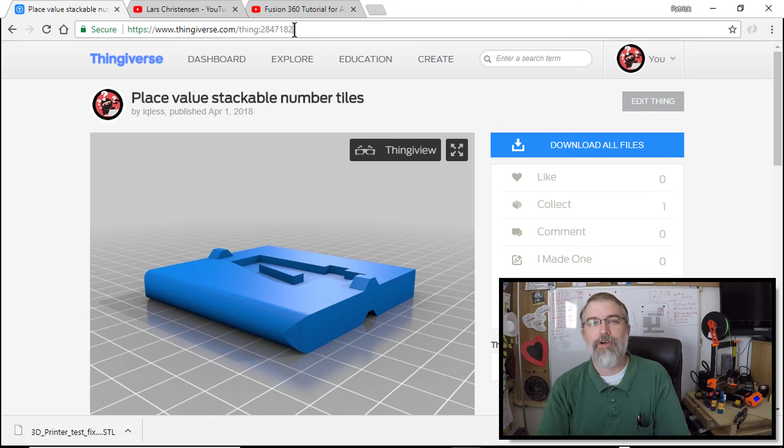I think 3D printing is huge, and it will be huge for homeschooling and for schooling in general. So we have some needs to 3D print some stuff out for our homeschool kids to help them understand concepts. And I was hoping to put a challenge out to other people to do the same. So it's the start of it, and I hope it gets bigger, that my wife can challenge me and say, hey, I need something that does this.

Can you make it? And I want to challenge other people to try to make the same thing, or not the same thing, but something that would solve that problem. And then highlight it and show everyone so that a bunch of kids out there can have access to some really cool manipulatives that can really help enhance their education.

So with that, this is the first thing that we put a challenge out for. My wife put a challenge out to me to make something to learn and figure out your places, your ones places, your tens places, and your hundreds places. And so this is what we came up with, and I put it out on Thingiverse.

And so I just want to walk through showing people how I made it in Fusion 360 to maybe give some idea how you can design stuff in 360, even at a beginner level, because I'm at a beginner level. I've only done a few things, and I want to show you how I made it, and maybe you can get some ideas. I just want to share. Okay, with that, let's get going.

Okay, let me try to recreate what I created before here in Fusion 360. So let me get started here. So here's my model from before. I will try to show you how I made it. So let me start new. Don't save. Let me go up here and say new design. And then from here I will click right here and say new component.

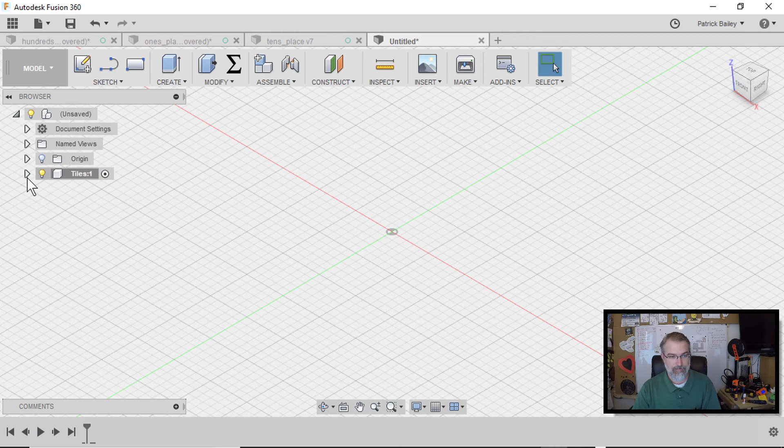And I will call this single tile, or just tiles, because it could be multiple tiles the way I'm doing it. So tile. Okay, so from there, I can open that up and click on that little light bulb so I can see these origin planes that I'm going to use here in a minute. And now before I get started too far, if you look over here on the upper right hand side, you'll see that my z-axis is up, which is not the default setting.

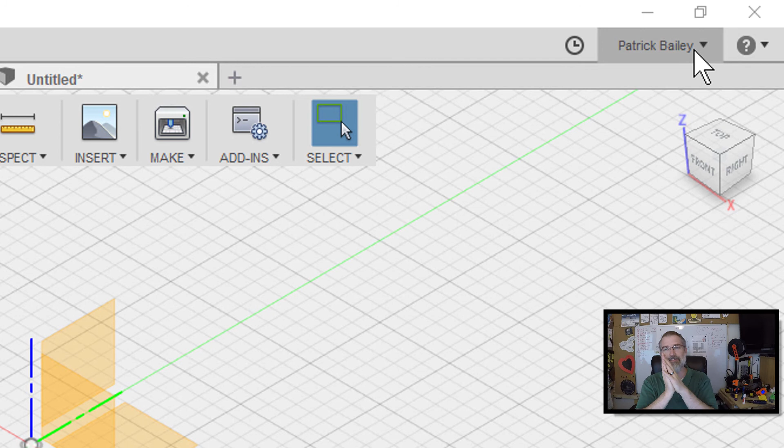But it's very useful if you're printing, because on 3D printing, the z-axis is up. Otherwise, if you try to create the 3D print from here, the STL file will be 90 degrees wrong, and you probably don't want that. So if you want to change it, you can go up here, go to your name, go to Preferences, and you'll see this default modeling orientation. And you want to set it to Z up. And then after you do that, you'd hit Apply and OK.

Now the last time I did it, even though it made the change, it didn't apply it to exactly what I was working on at that moment. So I actually had to go restart Fusion 360. So you may need to restart Fusion 360. Or if someone knows a button you can just push to refresh, that'd be nice to know too.

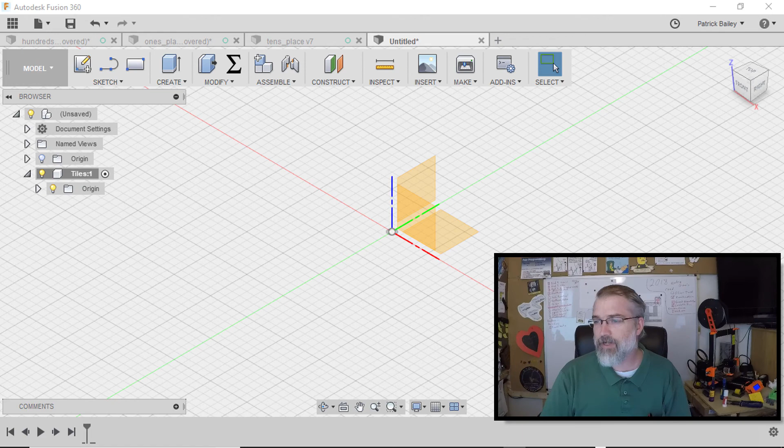Okay, so let's get started. This little tile is 10 millimeters tall, and it's 70 by 70. So what I want to do is create a rectangle that's 10 millimeters high by 70, and then extrude it 70 millimeters. In fact, I actually want to extrude it 35 millimeters, halfway, because then I'm going to mirror that object.

And there's some reasons I'm doing that, because I'm trying to follow good parametric programming at the level I know. Someone like Lars Christensen definitely knows what he's doing. I'm following him, trying to figure out how to do good parametric design. And so that is part of it.

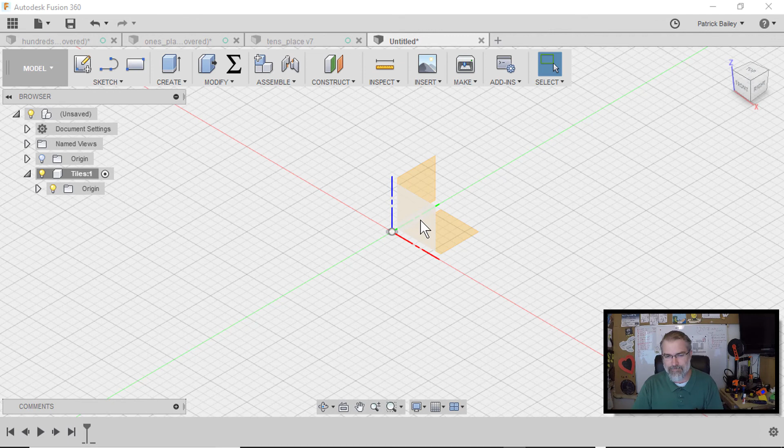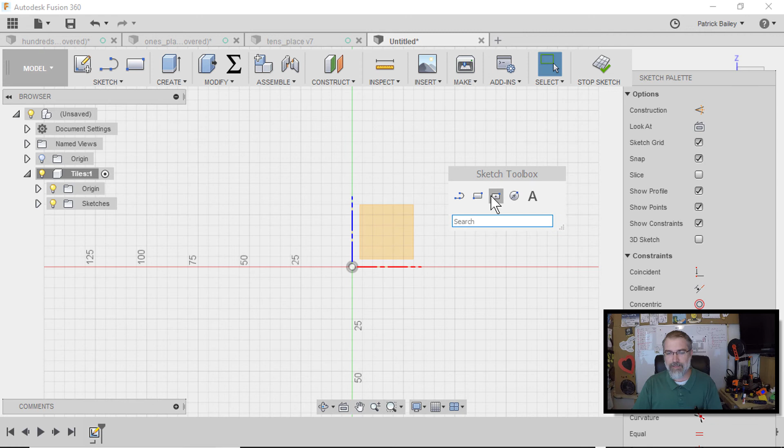So let me right click on this face, this plane, and hit create sketch. I want to create a rectangle here. I can come up here and find the rectangle tool. But an easier, better way to do it is I can press S, and this little sketch toolbox pops up. In this little area, I can put the common tools I want to use, or down here I can just search for it. So if I search for rectangle, I'll see there's 3 tools.

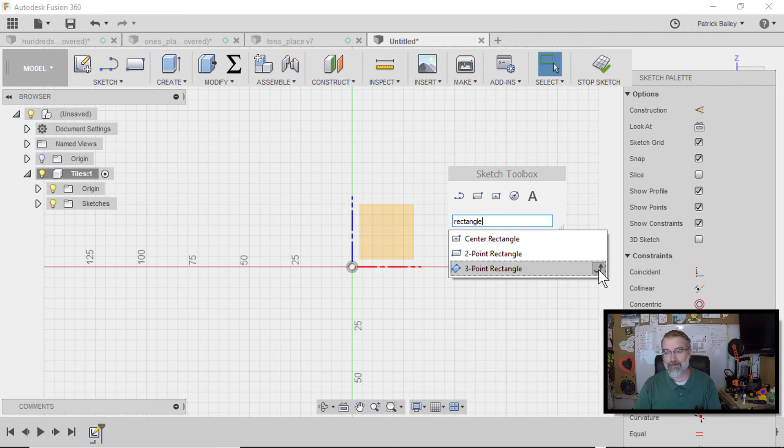Now 2 of those tools I already have in my sketch toolbox. This third one I don't really need either. But if I wanted to use it, I could just click on it. If I wanted to add it to my sketch toolbox, I could click on this little curly arrow and it would get added, like it just did right there. But I don't want it added, so I can click on that, drag it off, you see the little trash can, and let go. Now it's gone. I actually want to use this 2-point rectangle tool.

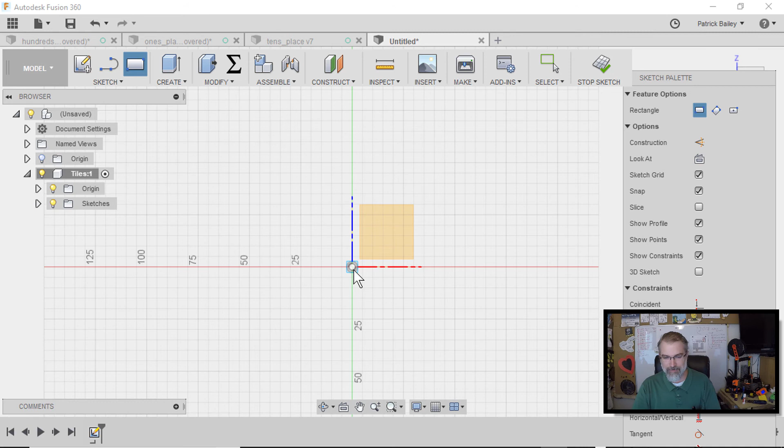So I'll click on there, and then I want to tie this down to the origin. You see this little dot down here is the origin. So I'm going to tie it down there. I'll click there and go out. And you can see I kind of snap to grid here. So I can actually go down to 70 and down to 10 and call it good. But a quicker, more precise way to do it is just be arbitrary like this.

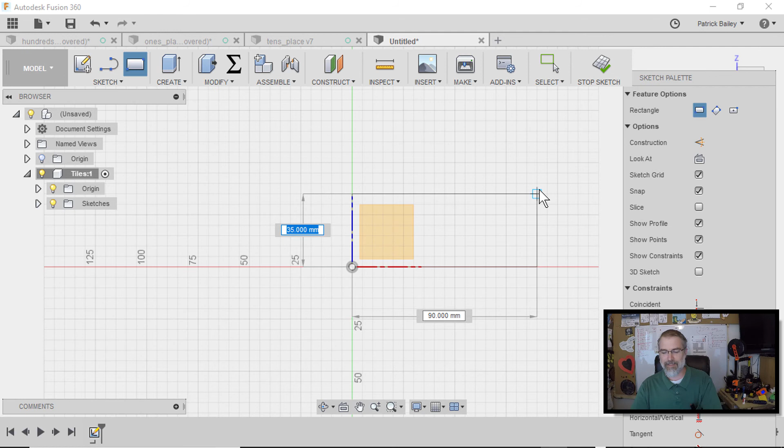And then, in the box that's highlighted, I can start typing. So I can type 10 for 10 millimeters, hit tab, which goes to the other one, then type in 70 and hit enter, and now I get the exact rectangle with the exact dimensions I want. You can also see that all the lines on it are black, which means it's tied down, it's constrained. I think constrained is the correct word to use.

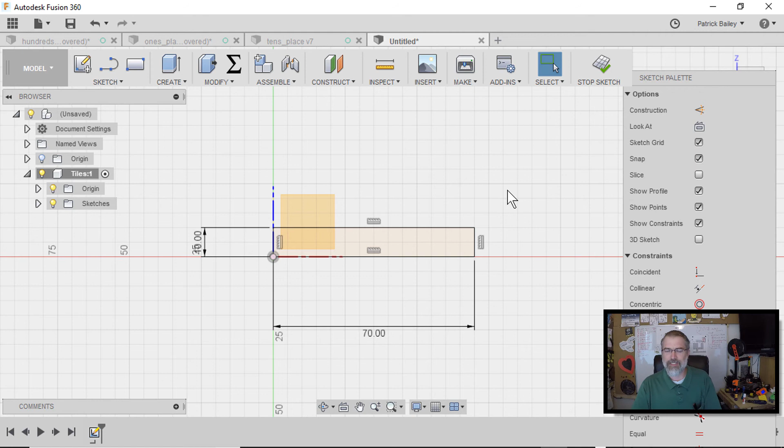But let me show you the difference between something that's constrained and something that's not. If I draw another one where I don't start at the origin, but just do it right here and hit enter, you'll see all the lines are blue. And if they're blue, they're not tied down. Now you can draw something blue and tie it down later, which is what I'm going to do in a few minutes. But if you see blue, you want to tie it down for good parametric design. Okay, so let me undo that, Control Z.

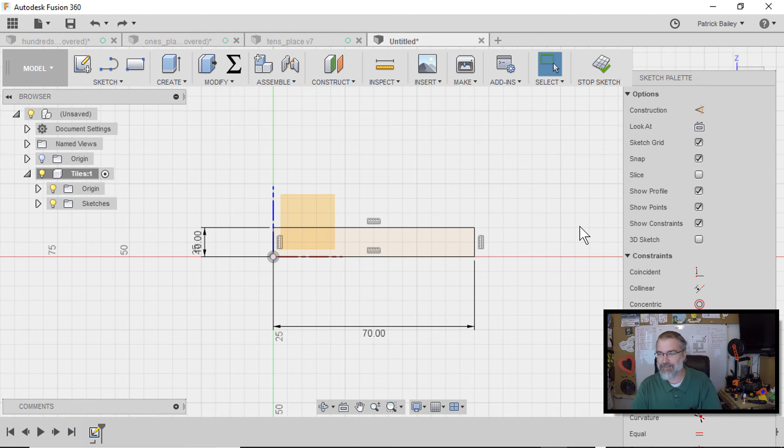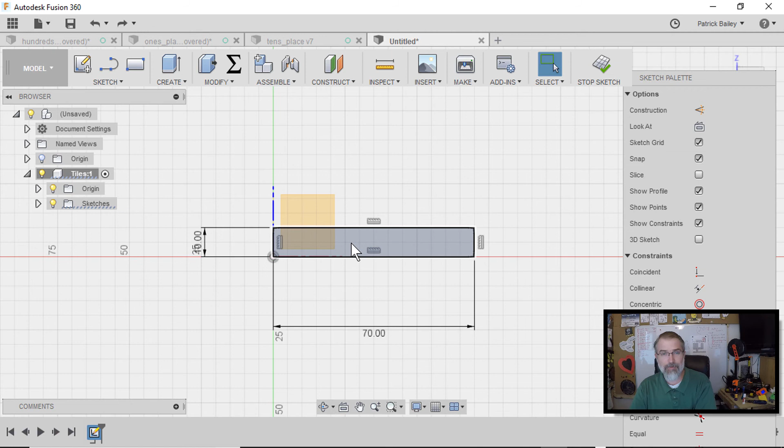Okay, so now I want to do my first extrude, where I want to extrude this out 35 millimeters, which is halfway. So I can come down here and click on this little plane, I guess you'd call it. What's the right word? I'll learn the right word here. And I'll press Q, and Q will bring up my press pull tool.

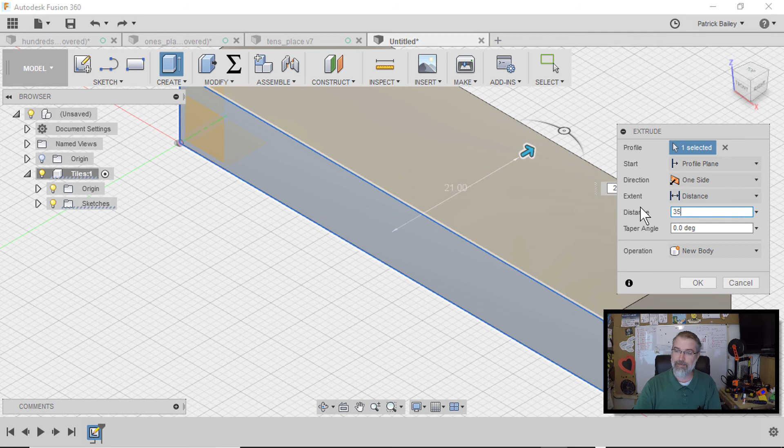And I guess maybe profile is the right word. And so I've selected that profile, and I'll go up here and click my home button so I get a more interesting orientation here. And now I can drag it. And so I could drag it to 35, or I could type in 35. Boop. And it's going to be a new body, and so I hit OK. And that is exactly what I want.

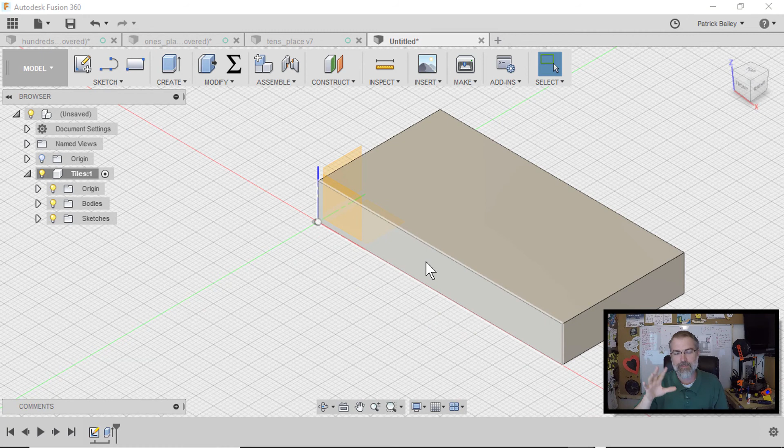So there is my first extrude. My first extrude is done. So I've made half my tile. Okay, now on to getting these little grooves in here. So getting this little area removed and this little area added so they can rest on top of each other. So what I'm going to do there is I'm going to draw on this plane right here on this box that we just extruded. So I'll right click on here and say create sketch. Now I'm looking at that side.

And then what I want to do is I want to create some construction lines that are not going to be part of my drawing, but that I can use to connect the other lines that I'm going to do. So I'm going to start drawing lines. So I can press S and choose my line tool, but also you'll see here under that line tool it says line L. There's a quick key. Just press L. And you use lines so much, you might as well learn to press L, right? So I'll press L, and I'll just click to a grid here.

I'm going to make this first line a little arbitrary. And I'll make it straight though, 90 degrees, and click here. And now I'm still stuck drawing, but I'll hit escape. And there's my line. Now I want to make this line a construction line rather than just a regular line. So I'll click on here and click construction. And now you can see the dash, dash, dash. It's a construction line, so it can be used and connected to other lines, but in a way it doesn't count. But you can see it's blue.

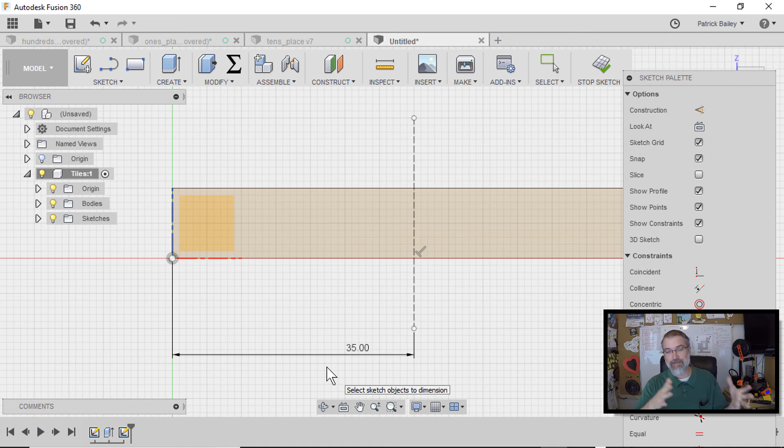So I want to tie it in. So to tie it in, let me zoom in here a little bit and fix something. I just moved that there so it's on line, for convenience sake. It's still blue. So let me press the D button, and now I have this dimension tool come up. You see my mouse pointer changed. So I can click on the origin, and then click on this end point here, and this comes up. And so I can click on that and type in 35, hit enter, and so now that's tied in. Now it's black, and so now this line is at 35.

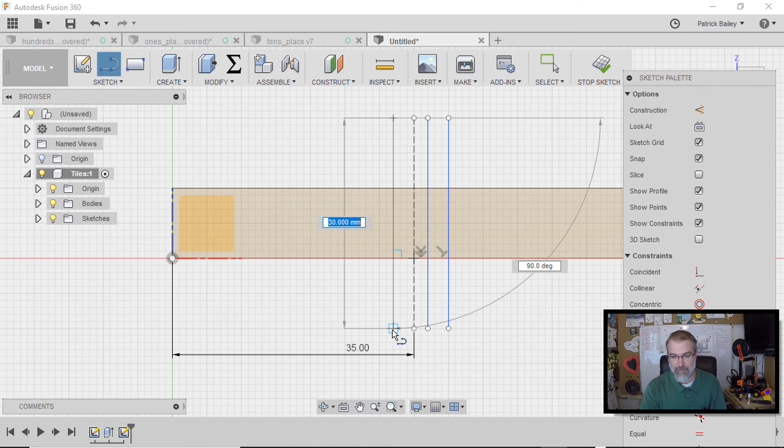And now I need to make some more construction lines that are parallel to this one. I need to make two that are 1.5 millimeters out on either side, and then two more that are 3 more millimeters out as guidelines. So I'll create 2 lines on each side right now just to get them there. So I'll put one there, hit escape, put one there, hit escape, put one there, hit escape, and last one, hit escape. And then now I can probably choose all of them, no, you're not going to work for me. Let me see. Shift, there we go, shift, select, that'll work. And then make them all construction lines.

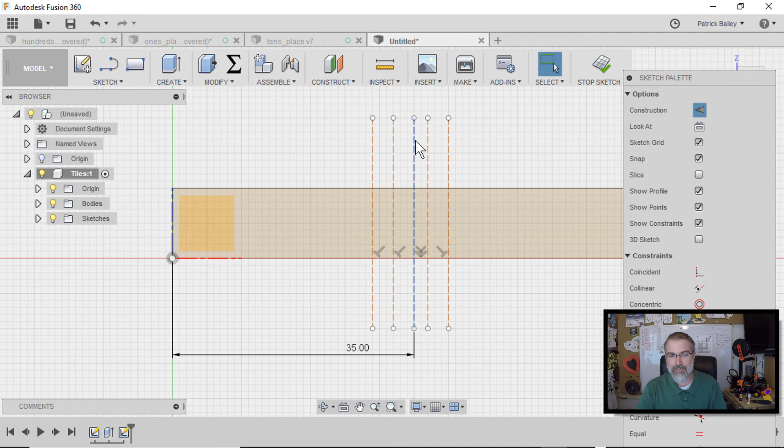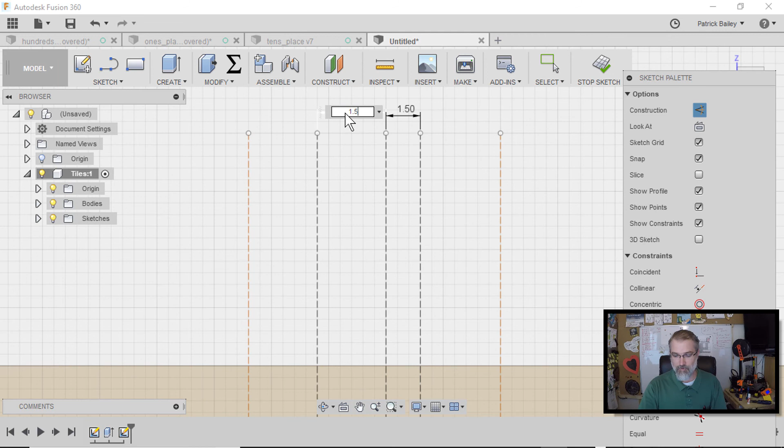All right. So now I need to get their dimensions correct. And so this line's tied down, so I can tie these lines down to that line, and then we'll have them all tied down in black. So I'll hit D, click that, and click that. And I want that to be 1.5, and then, well, I'm still in the D dimension mode. Click that, type in 1.5, and now those two are tied in. And then I click the D button, and I can click on there, and enter 3, and now that one's tied in. Do the same thing over here. So now I've got all my vertical lines tied in.

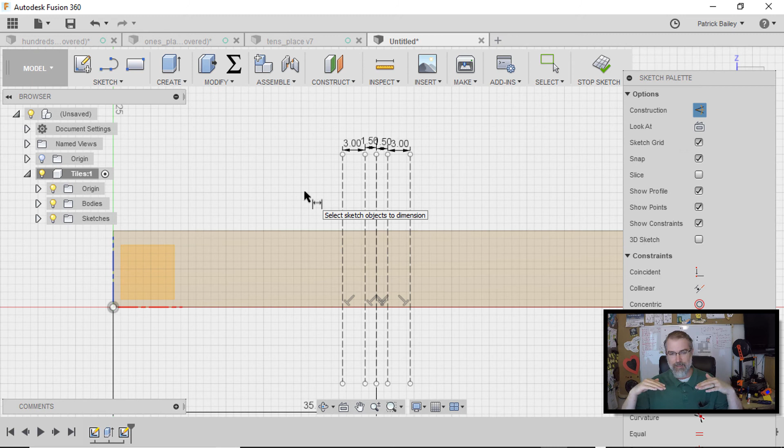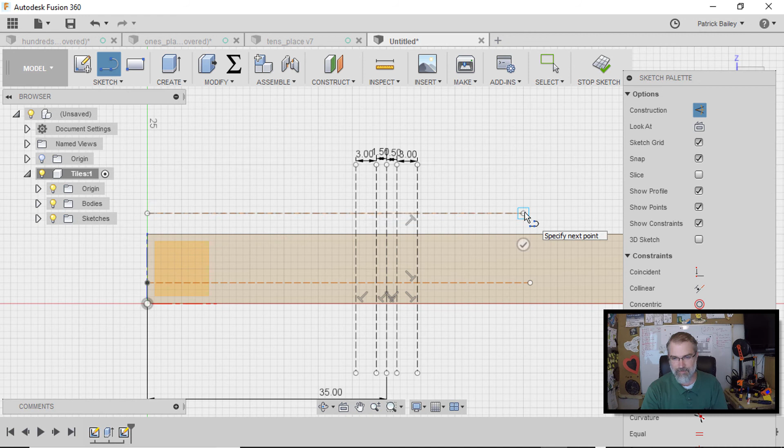And now I need to make two horizontal lines. One should be 3 millimeters above the top, and the other one is going to be 3 millimeters above the bottom. So again, I will come down here, and I'll draw a line. I'll select this line and come out straight, and hit escape. And then I'll come over here and draw another line, come out straight, and hit escape. And I guess I'll make them equal to each other right there.

Okay, and now those lines aren't tied down either, so I'll hit dimension. This one, though, is actually constrained. I'm still learning all this. But you see this little circle here? I believe this line is constrained to some degree, attached to this line. But it's still not fully constrained, so I'll use the D, hit that, and you're not working with me.

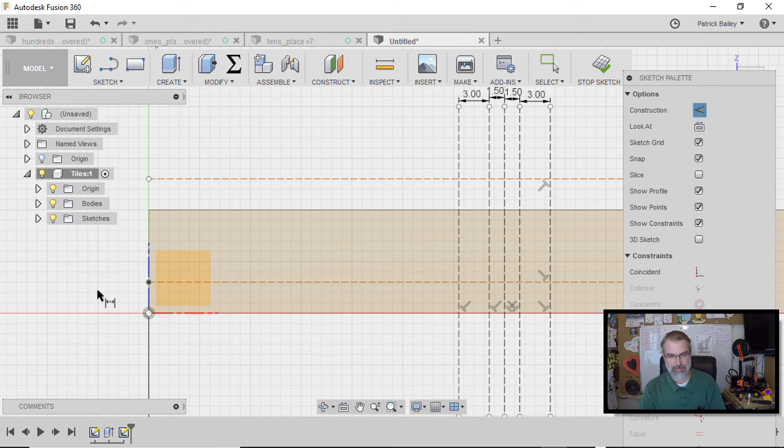What are you doing there? Let me escape. Let me try that again. That line, and that one. Okay, something's not liking me there. Let me hit escape. Okay, D, press the origin, and that line, and come out. There we go. Oh, I happen to draw it right at 3 millimeters, so cool. And so now that one's constrained, it's black.

And I'll do the same thing up here. I'll click right there, go up there, and come out in 3 millimeters. So I luckily drew them correctly. Okay, so now they're both tied down. So perfect, I got these guidelines here that can help me draw.

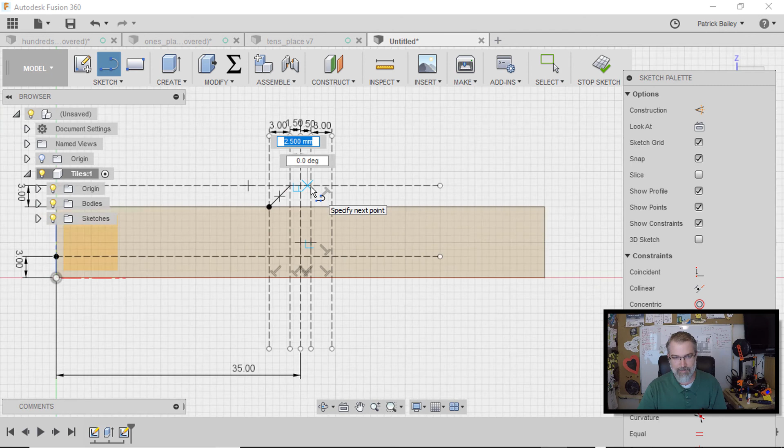So now I'll come in here and press the L key. And now you can see I'm in construction mode, so I'll uncheck that because I just want to draw regular lines. Then I'll start here, click there, click there, click there again, and then where they intersect, there, there, and there. And now I should have a face that I can choose there.

Let me escape, get out of that. Now let me go down and draw the other one down here. Press L, click, click there, click again. And there we go. I don't think I have to draw the bottom line because there already is one, I'm guessing. Let me hit escape. Yeah, I don't have to. So you can see I can choose that. I'm not exactly sure what these are called. Faces, but I can choose this little area because I want to extrude this.

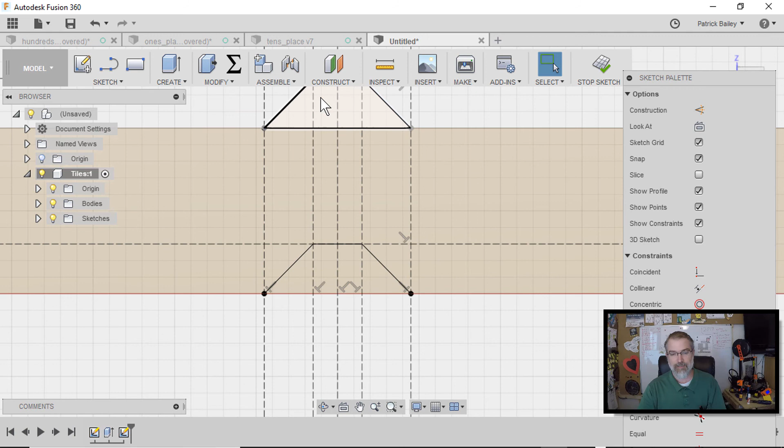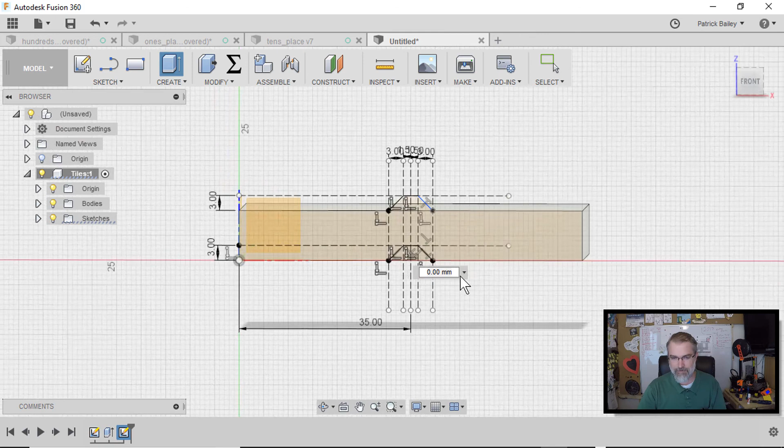So now the next thing I want to do, because I want to extrude it, is to push the Q button. The Q button will bring up this press pull tool. And then so I can see it better, I'll click home, which will give me that different orientation. And I'll select that top one, because I only want to do one at a time, because they are different. Wait, no, let me choose the bottom one first. So I'll press Q again, and select the bottom one.

And if I pull it in, you can see it turns red, which means it's subtracting. That's the default. And in my case, I want it to be -5 millimeters. And you can see it's going in, and it's doing a cut, and hit OK. So, exactly what I wanted.

Now, after I did that, to help me out, I guess the tool decided to hide my sketch. But I want to see that sketch so I can extrude the other little knob up there. So I can go over here and click on Sketches, and hit the little light bulb there, and there's my sketch again so I can see it. So I'll press the Q tool again, and then select that, and now I want to do that.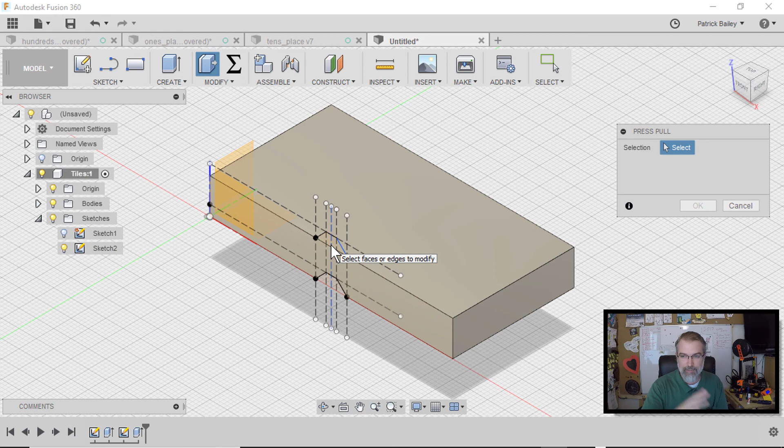Now what I originally did is I put them both the same, just to test it out, because I wanted them to rest on each other, and I thought that if I made them exactly the same, they wouldn't rest completely. I thought the top would be too big because they were the same size. I thought I was going to have to make the bottom one a little bigger so that it could just rest on top of it. Well, it turns out when I did them both the same, they actually could click on each other. I guess because if you're on the top, you're kind of pushing the other ones out just a little bit, and it kind of clicked.

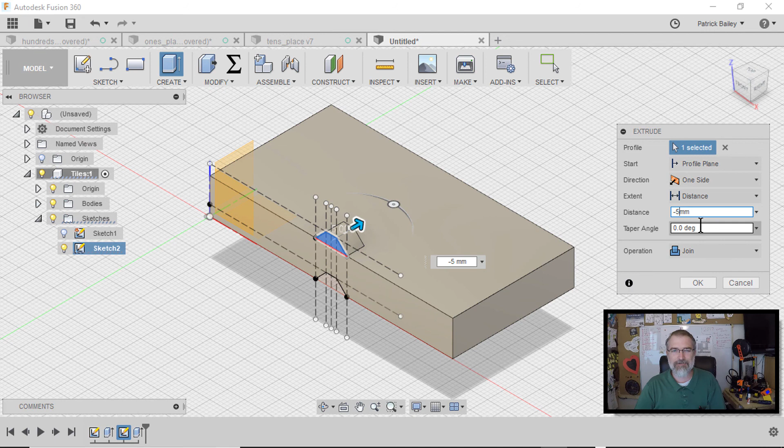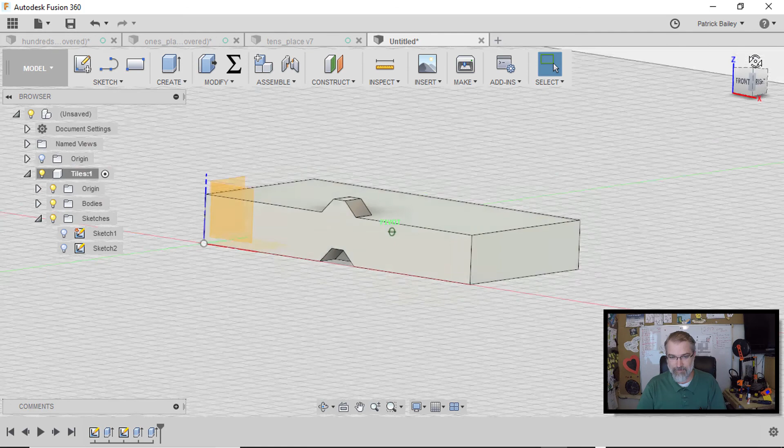So I left it at 5 millimeters, but then I printed some other ones out, and they didn't quite click as crispy. So I decided to actually make the top one a little bit bigger. So I made it 5.15 millimeters, which is technically bigger than the smaller one, but it actually works for clicking, and so far it's worked pretty well. So I hit OK, and let me hide my sketch there, and so you can see, there I've got the bottom cut out like I wanted, and the top. So it worked really well.

Okay, now that I've got half my shape, I want to mirror this shape on the other side. So what I will do is I can press the S key again and search for mirror. And there's a mirror tool. So I can click on that. And it says, select a body. So I'll select this body. And then I want to click on here to select a plane.

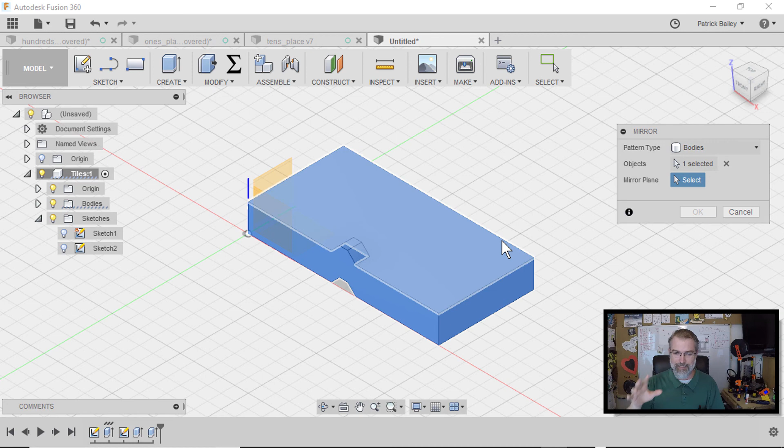And I want to select the plane that I can't quite see right now. So I'll maneuver this guy. I want to select this plane, which happens to be part of the object. And I want to mirror it on the other side. And after I do that, you can see I get this little shadow of what will occur when the mirror tool is done. That's exactly what I want, so I hit OK. And boom, I've got my mirror.

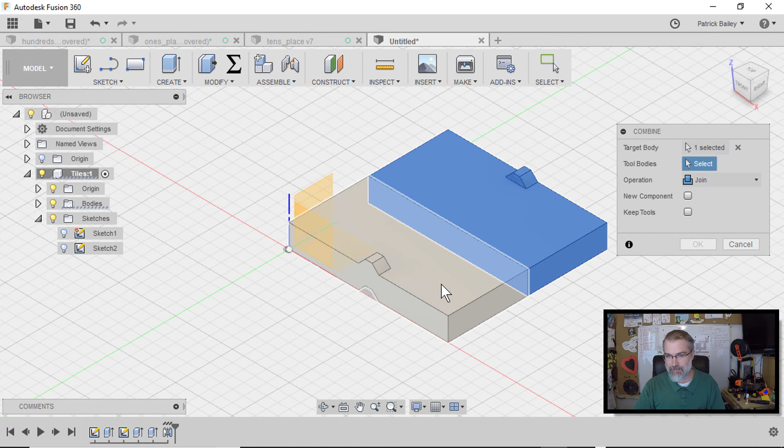Now the next thing I want to do is combine these two into one object. So I can do S key again and search for combine. And there's a combine tool. Select that, and then select bodies. Select that one and hit join, and hit OK. And so now they're one body.

And so now that you see that, and they've been parametrically designed, I can actually go back in my history, and over here you can actually see, here's my history. I can actually drag this and go back in history. So that's before I mirrored, that's before I did my 2 extrusions, there's my old sketch, and I can kind of go back through my history, every little thing I did.

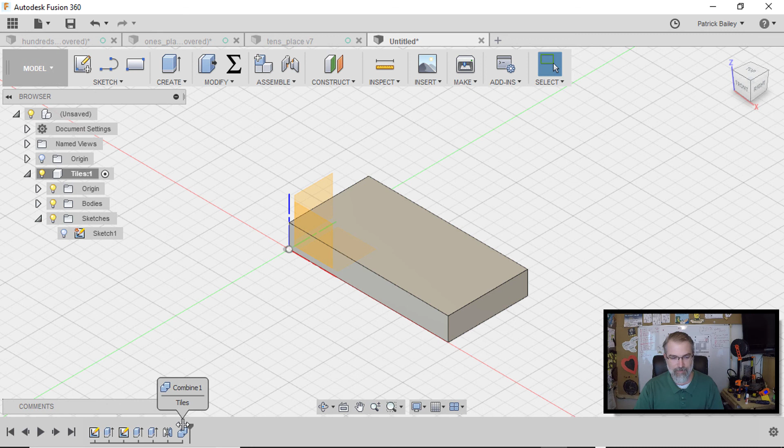Also, I can right click on this and change some aspects. So I can go back in here and let's do something simple. Let's say the extrusion on the top. So I can right click on that and say edit this feature. So I actually extruded it 5.15. Let's say I'm wrong. I want to extrude it 10. So I'll do -10, which you can see extrudes it there.

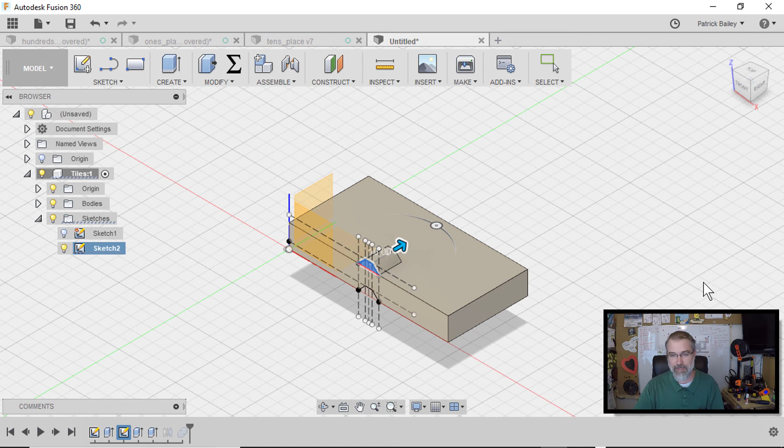But I just want to show that there's a reason why you do all that, because you can go back, because that's exactly what I did. I went back there and I had 5 millimeters, and then I was able to change it in one place. So with this guy, you can see I have a bunch. And so I only had to change one little piece of one little timeline in history, and it actually changed all 6 of those little knobs, which is really cool and very useful.

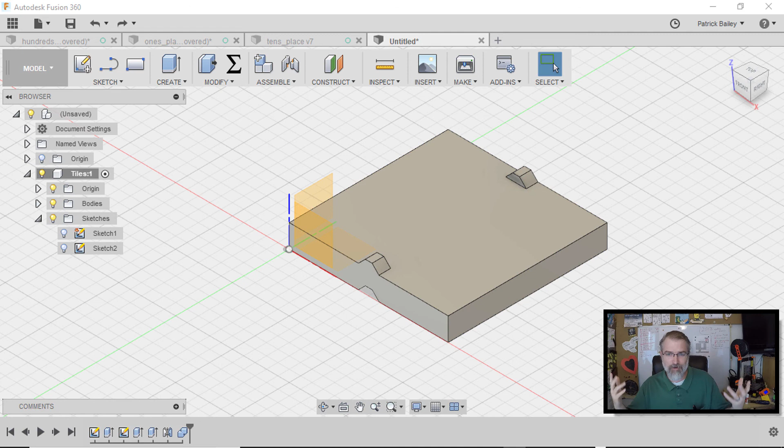Okay, so we have that. We combine them. And so what I'll do, I'll make this more than a single one. We'll make it 4. Why not? We'll make 4 of these tiles, it's a tile with 4 numbers. And there may be a better way to do this, but we'll do what I did. So I'll right click up here and I will create a sketch.

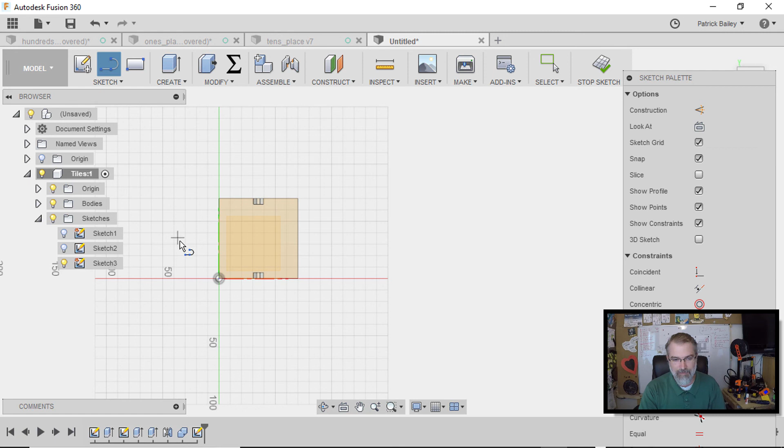And what I want to do now is create a guideline that I'm going to use to multiply these tiles over. So I'll hit the L key and I will make a line right here. I'll make it really long. Boom. And hit escape and I select that and I'll make it a construction line. And this line needs to be in the middle, so 35 millimeters up.

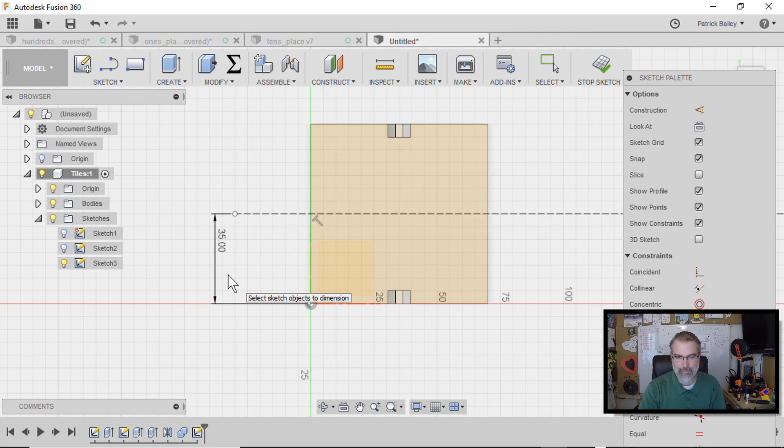So I'll zoom in, not that I have to zoom in, and press the D button, and I will select that, and try again, and there we go, 35 millimeters. And now it's black, so perfect. That's exactly what I want. And I can come up here and see that I have this little line in space going down there.

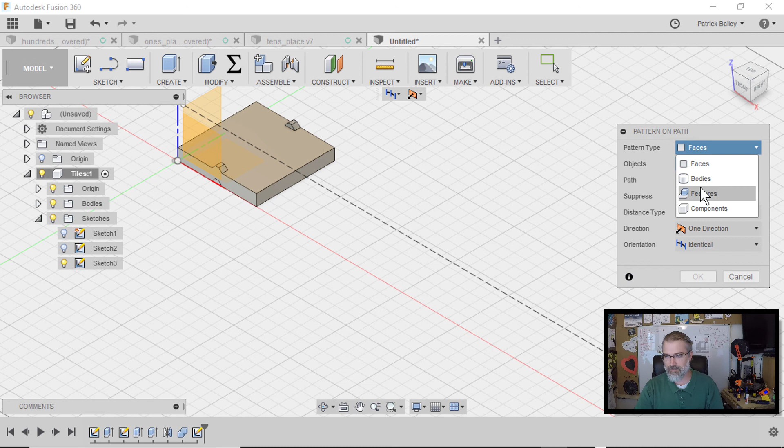Cool. So now that that's done, what I can do is I think they call it a path pattern. Let me try to find it. So let me do S and path, pattern on path. There we go. Pattern on path. So pattern type is going to be bodies, I think. And so I will select my object.

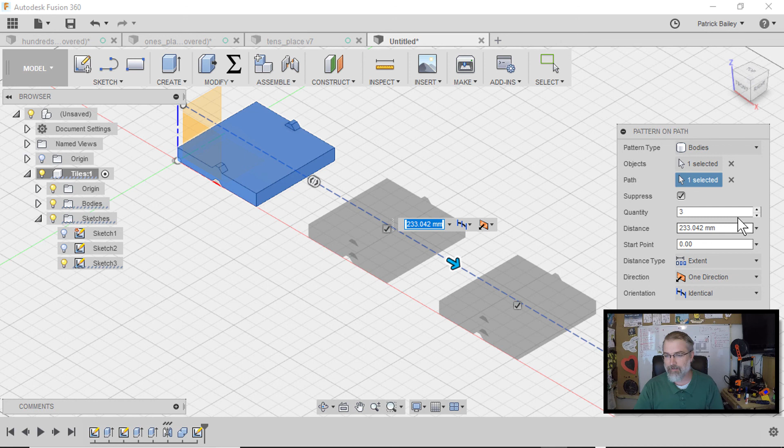So I want to replicate this object in a certain way along this path that I just created, this little dotted line. So then I'll select a path, I'll select that line, and then I can do stuff like this. But I know how precise I want it, so I can come back here and say, you know what? I want 4 of them because I'm going to do 1,000 in this example. And the distance of each one I know should be 70 millimeters, I think. Or I might have to double that.

Why are you... oh, the distance of the whole thing. So I guess you have a couple of choices here.

You could do 280... wait, no. Because technically it's 3, so 210? You could do 210 and do the math.

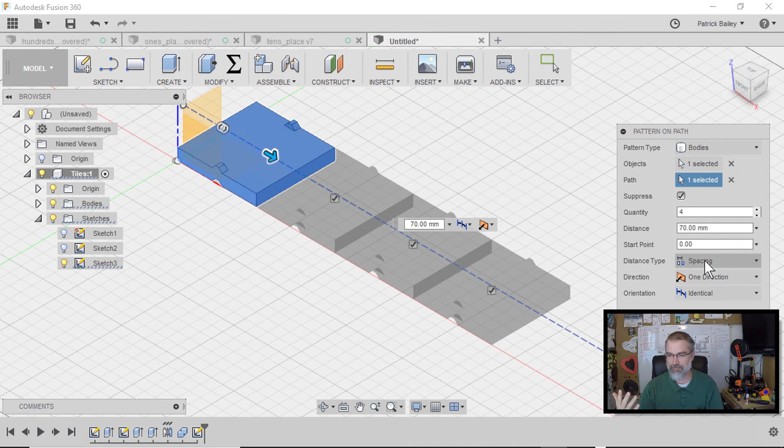Or what I did is you can change what you're doing. So that's extent, I think I did spacing. There you go, spacing, because I know they're going to be 70 millimeters apart. So I chose spacing in one direction.

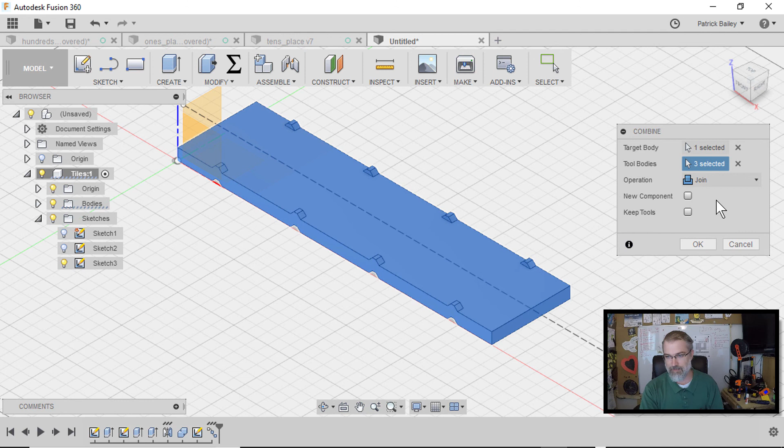And then I hit OK. Ta-da, and there they all are. And now I can go back and do the combine tool because I want to combine these all into one object. Combine, hit enter, and select, and join, hit O, and hit OK. And there we go.

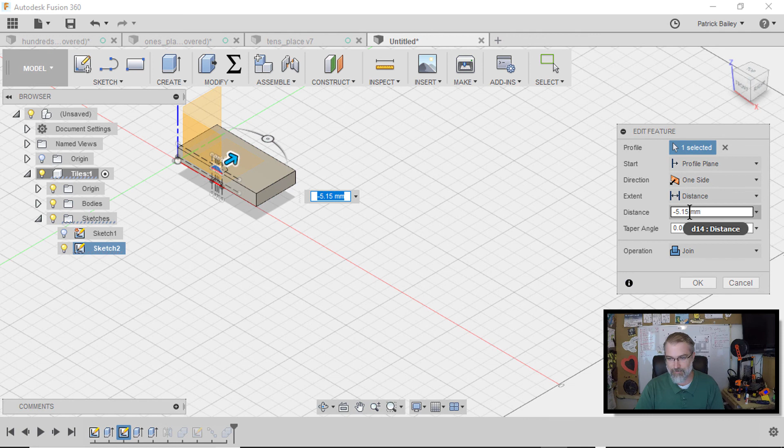So now we've got what we want. And so now I could go back as an example again into my parametric design, and I could say, you know what, I was wrong about that feature again. I want it to do -20. And hit OK, and you see how it applied now 8 times, really conveniently.

It's just really nice. Or I could even go further back into that sketch I made, because we're extruding that face. I think that should work.

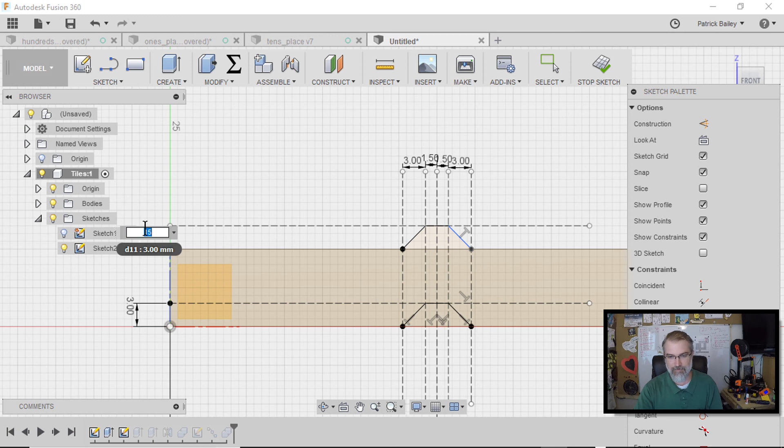I come back here and say, you know what, that was 3 millimeters, let's make it 15. Which is going to, well, I guess I didn't tie things down quite perfectly. That should be tied down there. Maybe I got some things to learn, obviously, right?

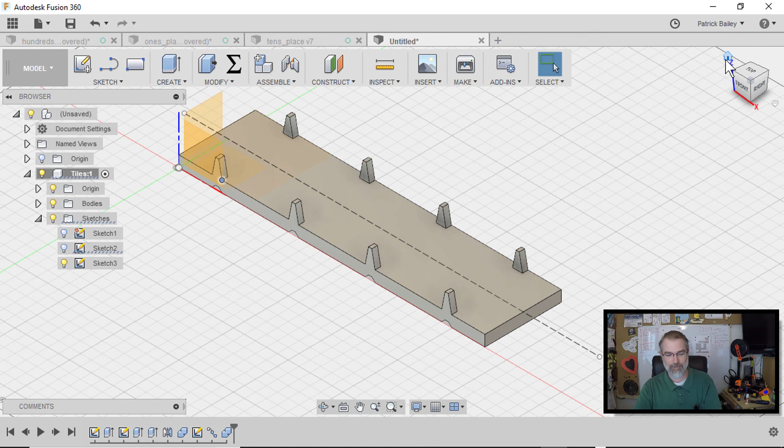Okay, and I hit stop sketch, and I hit that, and look, it got applied everywhere. So it's really cool. Let me undo that, that's not what I wanted. Undo that, back to normal. Okay, stop sketch, okay, back to normal.

So that's all one object. Cool.

Okay, now the numbers. Now I kind of played it safe when I put the numbers, so I actually ended up putting 4 different numbers on there. I might have been able to do it on the first one and then extruded it, but my thinking right now is, I should say, replicate on that pattern path.

But I think if I did that, I would end up replicating the same number. I might be wrong about that, but just to play it safe, I've learned enough as a beginner already. Let's just take one step at a time. I just decided to make 4 numbers.

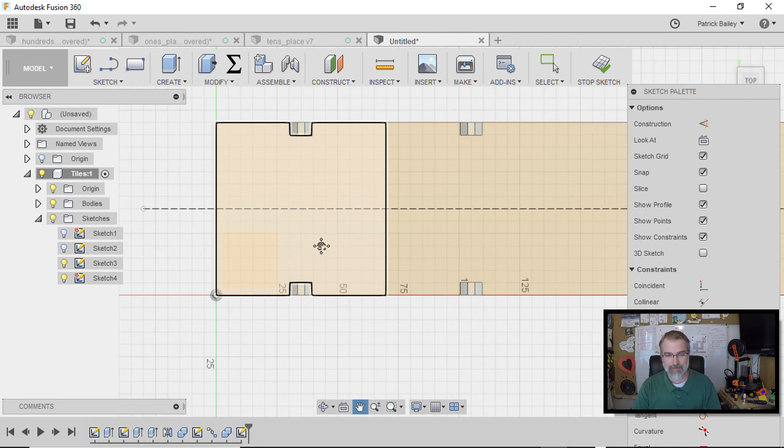So what I did is I right-clicked on that top and said, create a sketch. All right, create a sketch. And I could zoom in here, and what I did is click S, and there is a font tool.

So I clicked on that, and I think I just clicked on somewhere, and then I typed in a number. So I'll type in 9, and it shows up, but it actually shows up backwards to what I want, so I had to do a 180. And then I forgot what font I chose. Was it Impact? ISOCTEUR, I think that's the one I chose.

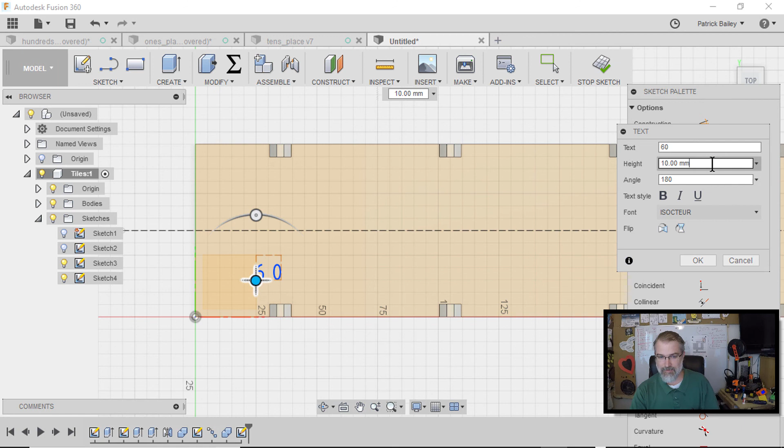But I want to make it bigger, so let me make it... oh no, not there. Height 100. Too big. 90. Let me go look back.

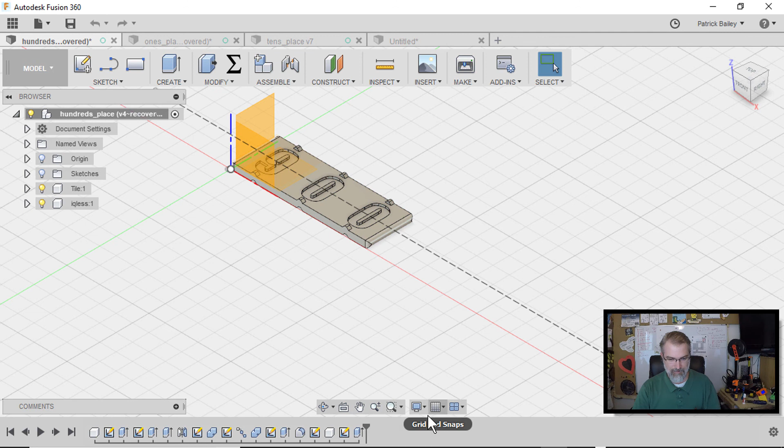What did I do? Which one did I choose? So I go back and say, oh, there's my number sketch. Number sketch, go back in this old history. Maybe I did replicate that.

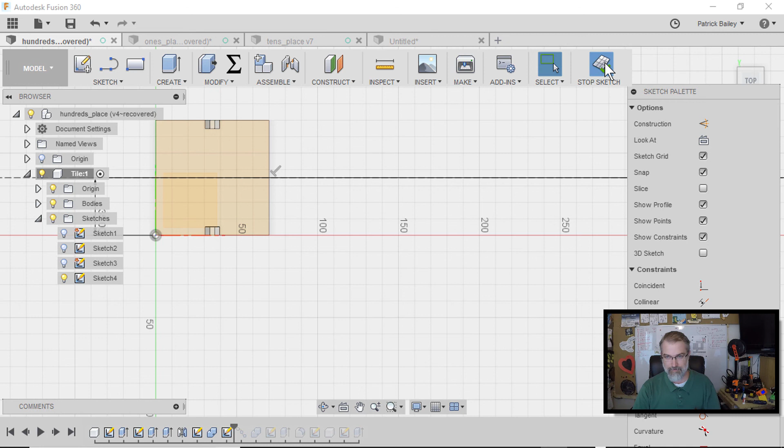Oh, that's a... let me view that sketch. What did I do? Nope, not that one. Stop sketch. It's fun trying to remember what you did, huh?

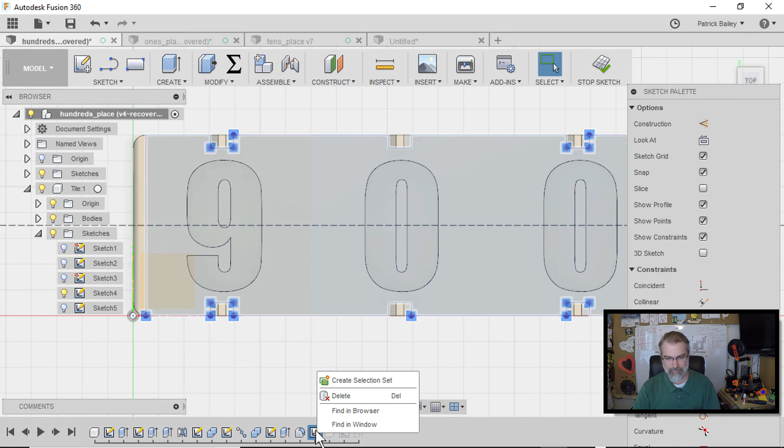Okay, I think it was there. Yes, there we go. Let me edit the sketch and look at one of these guys. Okay, where are you?

Let me go figure that out. Okay, I was looking at the wrong thing. So it is Impact, it happens to be 62 millimeters high, and it flipped 180 degrees.

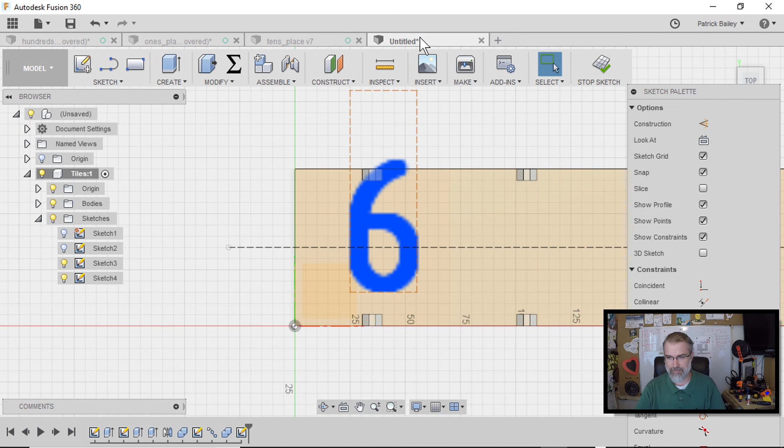Let me see if I can replicate that. So let's click on that. It was Impact, 62 millimeters. And there we go. So I just kind of place these, and I hit OK. And I get that.

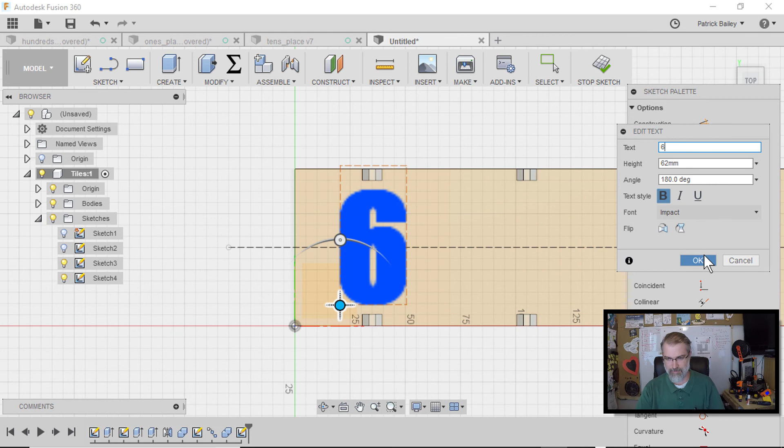I hit OK, and then I just, in this case, I just kind of copied and pasted. So I did a Control-C, Control-V, and then moved it. And kind of got it in roughly the right spot.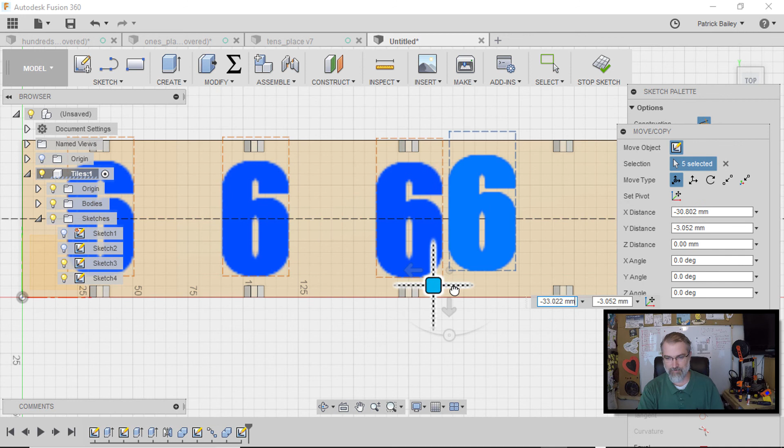And hit OK, and then copy-paste again. Select, copy-paste. Now, there may have been a better way to do this, but it's what I did. Hit OK, copy paste and move this guy over again, and hit OK. And now what I want to do is make sure they line up correctly.

So I'm going to do a D and then select right there and come over here and change it a little bit, so it's 9.45. It looks like it's fairly in the right spot, but let me lower it just to 9.

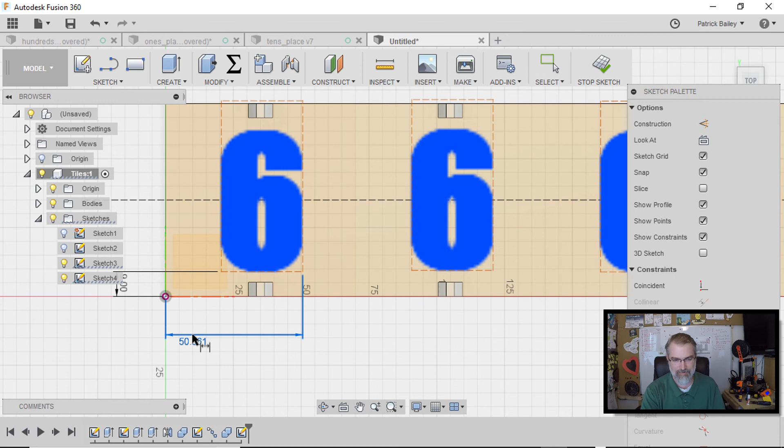Good. And then do the same thing over here with this dimension because I want to tie it down. It's 50, so 50.5, I'll just make it 50. Close enough. And then I know everything else should be 70 more than that. So if I do dimension here to here, that should be 70.

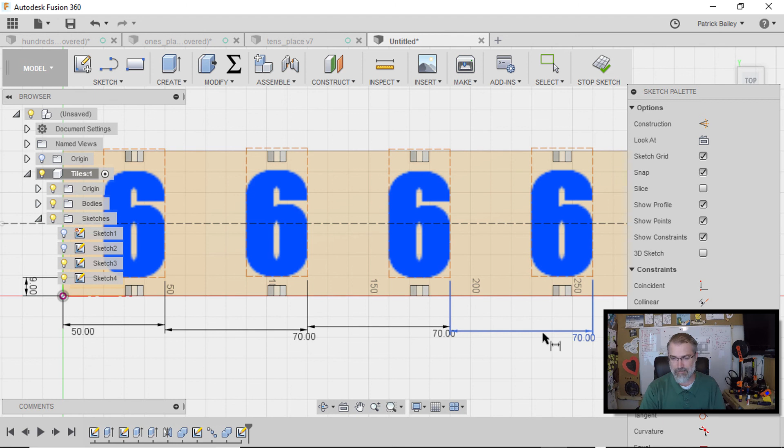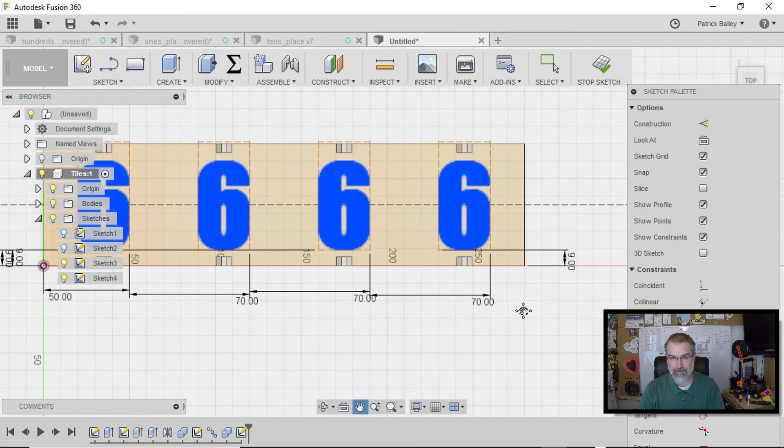See, this feels very unparametric. Okay, so those are all tied in, but they're not all at the same level. So I want those all to be 9. I'll come out here and do 9 again, do the same thing over here, 9 again, and I guess I can go here, and 9 again. So there is all those guys. I can hit stop sketch, and there's all my numbers, but they're not yet extruded.

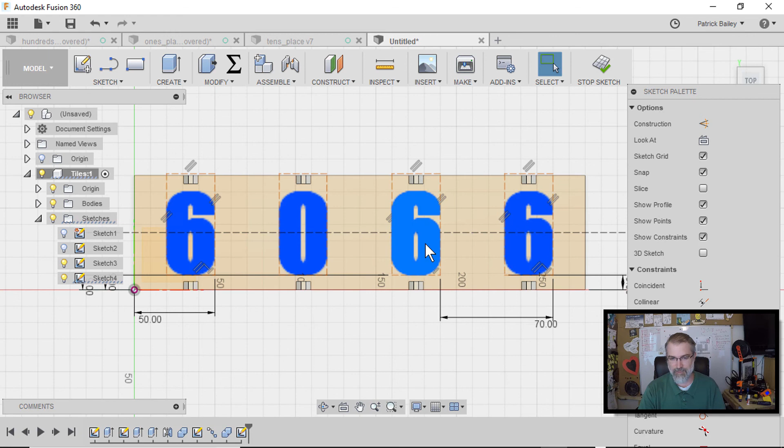So flip up here. Oh, let me go change it because having them all the same seems a little silly. Let me go back and edit my sketch. Click on this guy, and let's just make the rest of them zeros to follow the pattern I was doing before. 0, 0, 0, and double click on this and make him 0. And stop sketch. Okay, there we go.

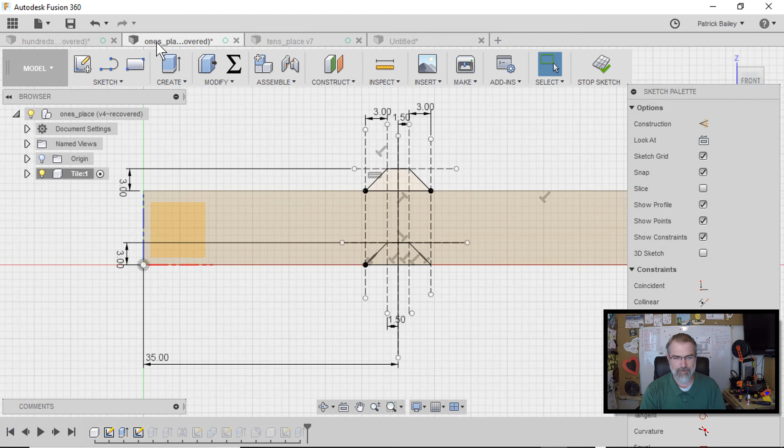Now hit Q because I want to pull those through, and I will hit Shift and select all of those. There we go. And now I can pull them down, and they'll extrude. So let's see, how far did I pull them down? Not far. Let me stop the sketch on this old one and see what I did. I extruded them right about there.

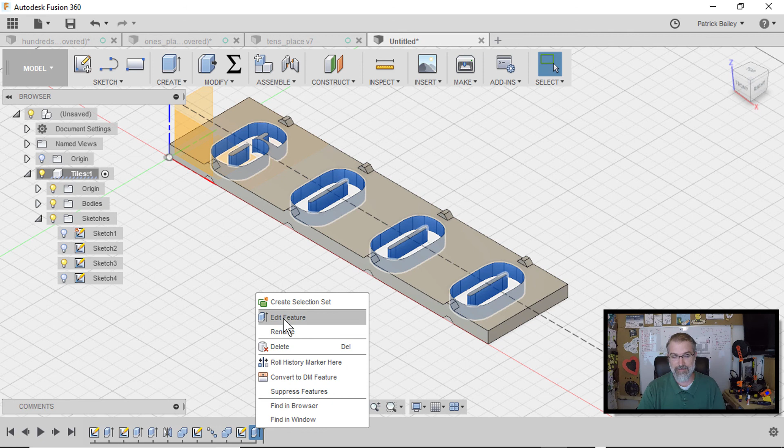Negative 3 millimeters. Let me go over here and do... let me edit that feature, and do -3, and it's a cut. Hit OK, and there we go. Dun dun dun, almost there. Only one last little thing to do.

The last thing to do is just do a fillet. I want to make those edges nice and round because you don't want some kid poking himself in the eye with a sharp stick, right? So you can use the fillet tool. Hit the S key, and it actually comes up as one of the options. So here it is, there's the fillet.

So I can select that, and then I want to select around the edges here. So I want to select this one, and this one, that one, and that one. You can see how they're all blue now. And then that one. You can actually select through an object, so I'm selecting that guy down there, and the two edges. I'll leave the other sides flat like I did. And then you have some different choices here.

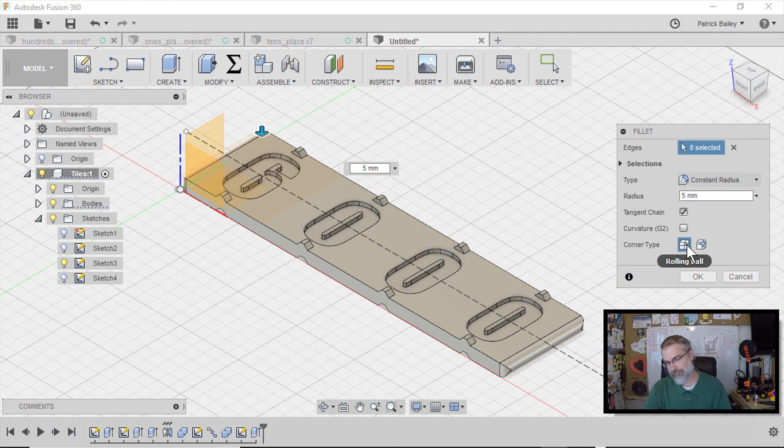If I hit OK right now, well, I have to change the radius. Change the radius to 5 millimeters so it's in the center, right? That is what I want. So I can choose that, or I can choose things like that. Yeah, I think there's not much difference. Yeah, so that's actually what I chose. And that gets me that round, but also a little round coming into here, because I don't want a sharp edge on that side either. Well, it might not be too bad. And then hit OK, and there I go.

There's my object, so I am done. Yay! So that's how I created this. The next thing I want to do, just to show, is...

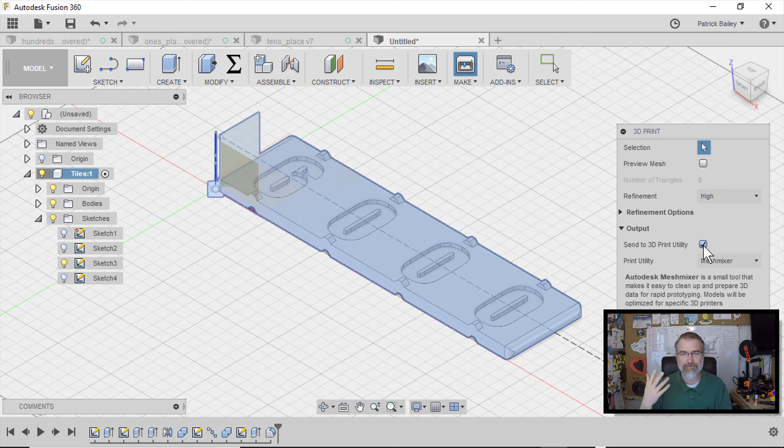to make it into a STL file. So I'll come up here and select Make 3D Print, and then select my object here. Right now I don't want to send it to a 3D print utility. I know there's a Meshmixer, but I haven't yet fiddled with that. So maybe in the future I will. But I'll unselect that and hit OK.

And I'll just save this to my desktop somewhere. I'll call it Tiles Video Test. Boom, boom, boom. And I'll come down here and open up Prusa Control, and we'll drop it in there and make sure it looks good, make sure it's what I did.

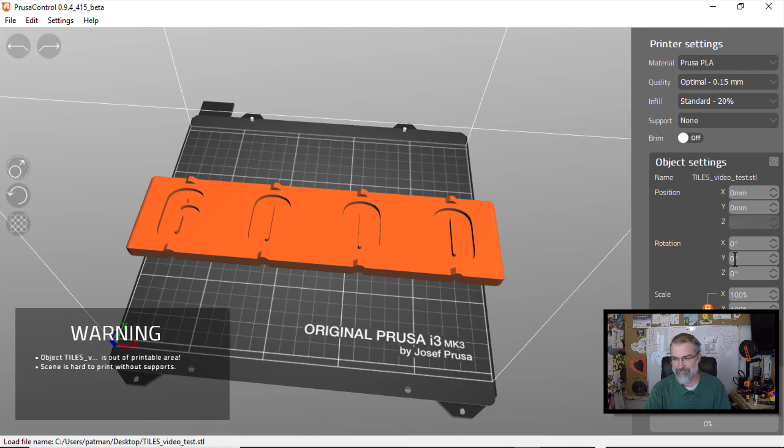Okay, tiles. Let me drop that in here. Boom. I guess I'm not doing one quite that big on my Prusa, right? I wonder if it even would fit if I rotated it. Oy, that's big. Let me do 45. Yeah, that's not gonna fit on my Prusa. But there it is.

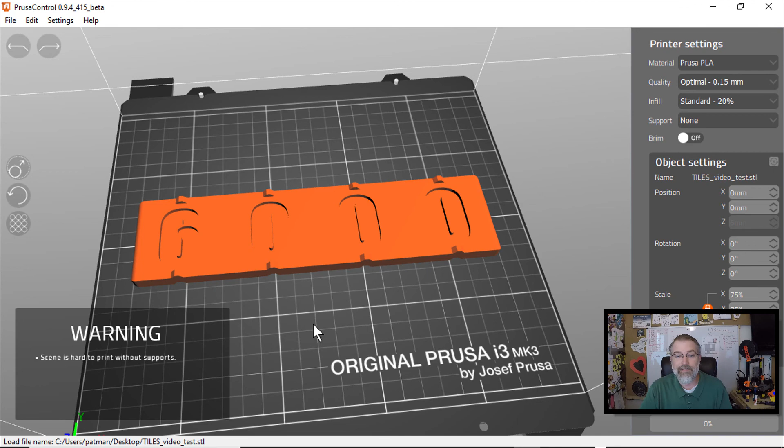So that's how I made my design. I guess I can come here and shrink it, right? Let's do 75%, that'll fit. Ta-da! There you go. That's how I made this manipulative.